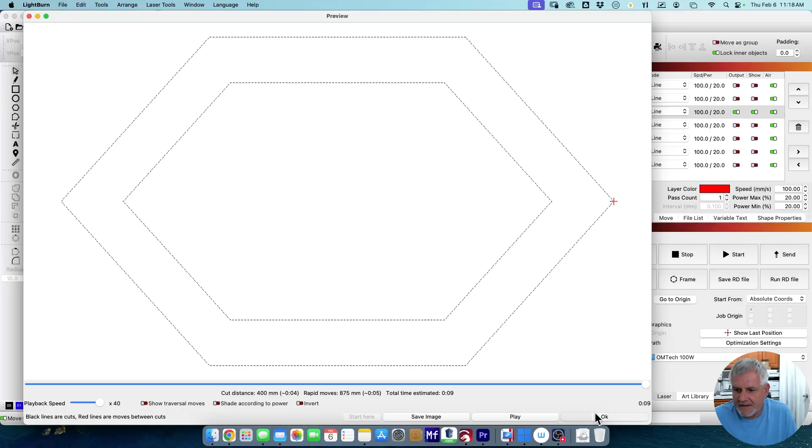Now I have this layer, which is what I've labeled double cut, and I've done a 2 millimeter outward kerf offset on here. I mean, 2 millimeters is not a number you're going to use. I'm just using that number for ease of visibility in this tutorial.

So now if I click on the preview, what you will see is we have our original perforated dashed line, and then our outward kerf offset goes outward here, but it goes inward here. Why is it doing that? Well, the outward motion, because it's a multi-shaped line, two shapes, it thinks what you're wanting is this center portion, and to go outward, it has to go out both directions. That's what's giving you your outward kerf offset.

So if you were trying to do like an inlay, you would cut out this, and then your kerf offset that goes in between there would have to be a little bit larger to make up for the kerf.

But if you'll notice on the outward offset, the corners are rounded. They're not pointy like the original image. And that has something to do with how the algorithm figures it. I don't understand that, but that's just how it works. So that's something you'll have to be aware of. On a very small kerf offset, it's not really noticeable. This is 2 millimeters, so it's quite a bit noticeable.

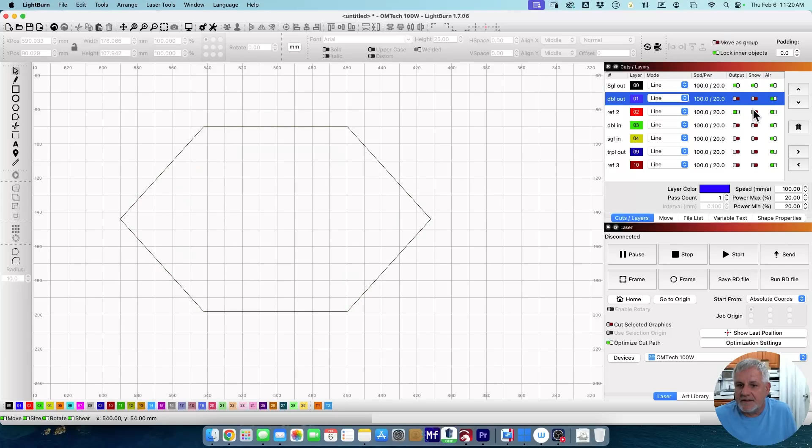Now let's go back in here. Let's turn off that layer. And I'm going to turn on this layer, which is just a single line. This is on the outer layer. It's a single outer line, and again, this has a 2 millimeter outward offset. We're going to click on that, and preview comes up, and you see now we only have a single line, and it's definitely pointing outward, which is exactly what you expect it to do.

Like I say, the difference is when you're working with the entire layer of both lines, it's making the entire layer bigger or smaller. When you're working with just a single line, it's going outward or inward, just like you would expect it to do.

Now, one other thing I need to bring up is for kerf offset to work, it has to be a closed shape. With just a single straight line, it does not work at all. In fact, let me show you that real quick here. And then I'm going to duplicate that. I select it first, duplicate it, and put it on black.

So now if we turn on the preview, you'll see we do not have any differentiation off the original line. It's buried back in there. In fact, I'll prove that to you by making this guy shorter. So the black one's quite a bit shorter than the red. We'll bring it back up, and you'll see the perforated line sticking out the ends.

And the main reason behind that is it doesn't know which direction to go. It's a straight line. It's not a closed shape, and there's no inward or outward to an open shape. It doesn't know what's inside and what's outside.

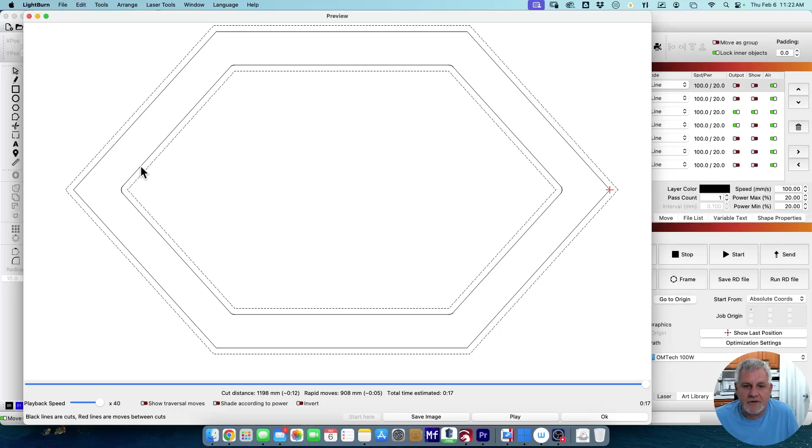And now you see, because it's the curved corners, because it's moving, it's making larger than the actual shape. So we'll turn that one off, and here we're going to do a single line, which is just this one here, and that's going to go inward. It'll end up down here. See, we still got our outer shape, our reference shape, and the single line is going inward.

So as you work with these shapes and work with your kerf offset, it's easy to get messed up and think it's going to do one thing when it's actually doing just the opposite. So that's why I recommend that you do something like this with a reference image that you can compare and see exactly what's going to happen.

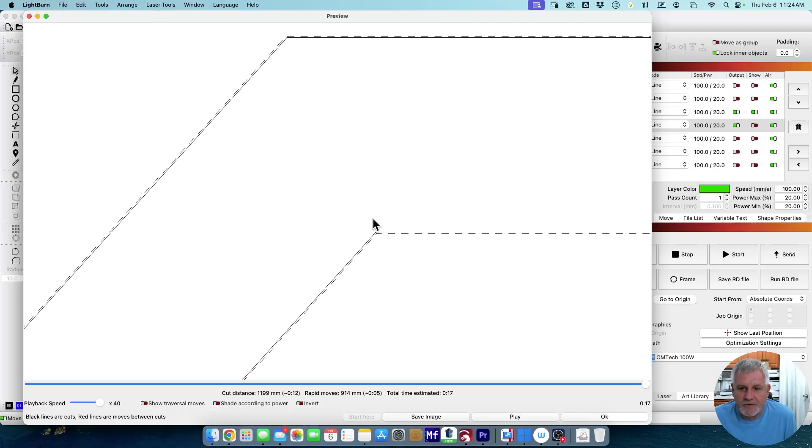In fact, what I'll do right now is I'm going to go turn that back on, and let's make this a more realistic kerf offset. We're going to go minus 0.1. That's not an unusual kerf offset. Let's see how that looks. So it's hard to see, but you can zoom in in preview, and with the zoom in, you can see what it's going to do. I just used the 2 for visual aid in this video, but in a realistic situation, you can always zoom in and see exactly what it's going to do.

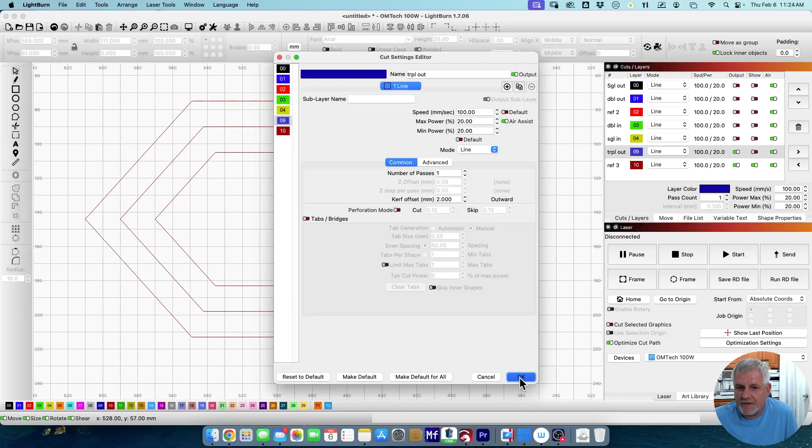So let's turn that one back off, and now let's really blow your mind. I'm going to do a triple. Going to have 3 lines, same shape 3 times, and this is our reference with the dashed lines, and this one here is going to be an outward offset of 2 millimeter. So what do you think is going to happen? Is it going to go here, and then what's it do with the middle one?

Let's find out. Okay, the outer line did exactly what you thought it would do, made it bigger, but the inner line went the same direction. So what happened here was it took the outer line and went out, took the next line and went in, making this shape larger. But then down here, when it gets to the third line, it comes back in.

It's acting almost like it does when you're looking at fill layers on closed shapes, where the first line it comes to, it fills everything from there on in, and then the next line it inverts and that's unfilled. Then the next line it fills again. This is acting basically the same way in my mind.

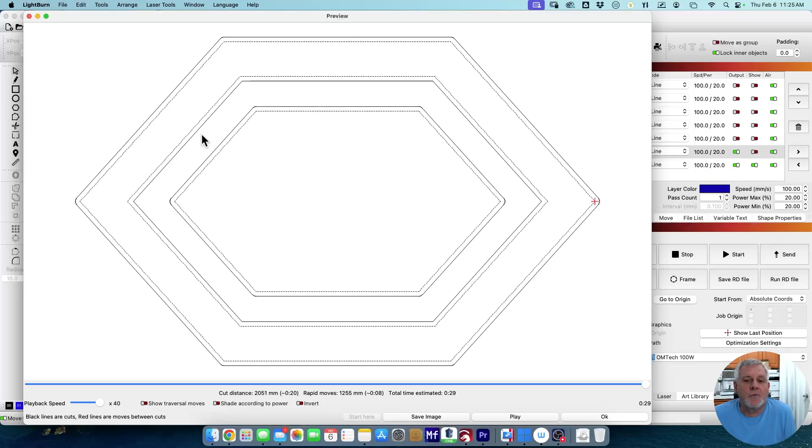Whether that's how they wrote the algorithm, I do not know, but it has no way of knowing what you want to do with a shape like this as far as kerf offsets. It doesn't know that you're actually wanting to offset these two, because this is a cut layer, so it's cutting all 3 lines. So that's the best way I can tell you how to figure out what a kerf offset's going to do for you in your situation.

Duplicate your shape for a reference, put it on its own layer, put it to perforation mode, that way you can distinguish it from what's happening with the kerf offset. Make your kerf offset and look at the preview, and you see if it goes inward, outward, both directions in, both directions out, and then you'll at least know what it's going to do for you.